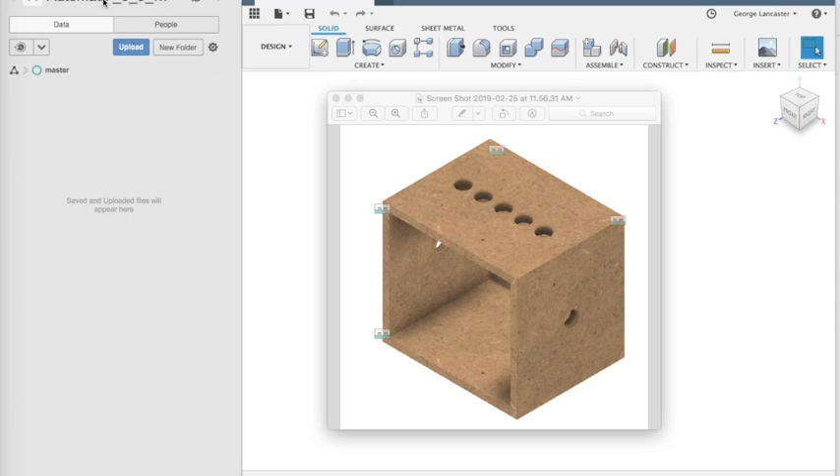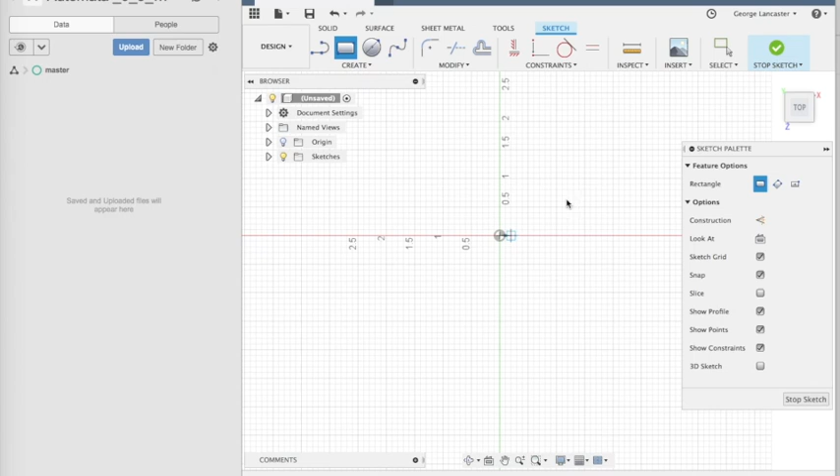The first step is to make sure we're in our correct project, and we're going to create a new part, create a sketch. I'm going to start on this because that to me feels like we're sitting on the ground. The bottom of the box is 4 inches deep by 5 inches wide.

So there's our sketch, and then we can extrude that 1/4 inch because that's how thick the wood is going to be. So there's the bottom. It doesn't much look like wood, so I'm going to change my body.

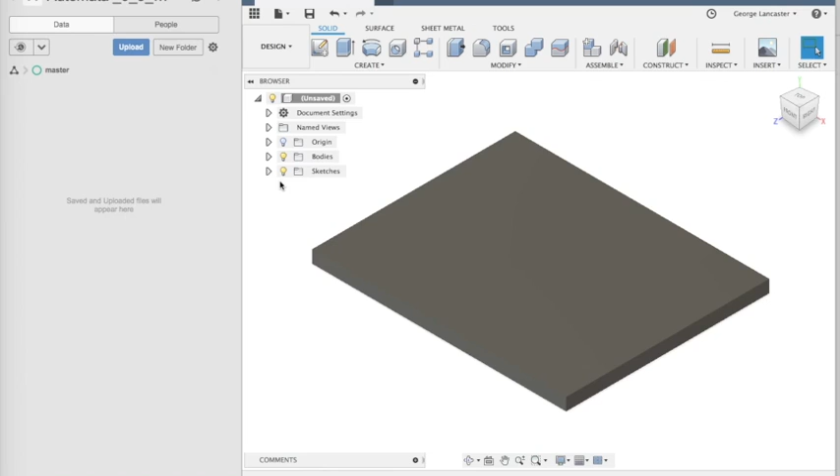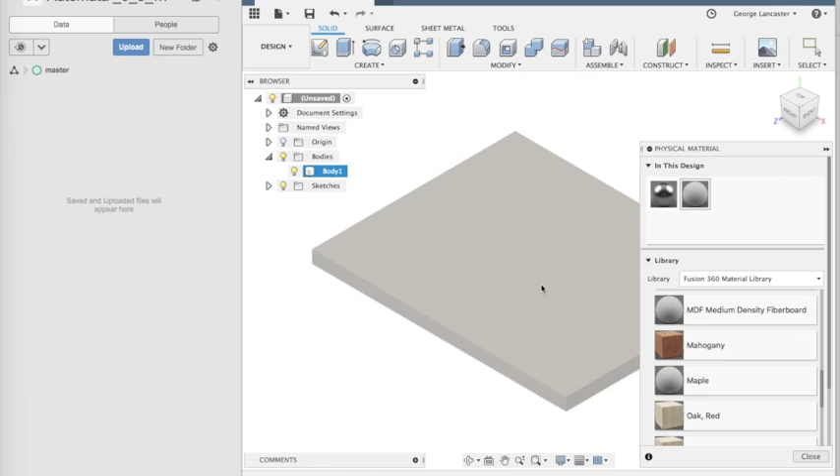Number one, I'm going to change the physical material to be a wood, and it's a fiberboard, so I'm going to choose that one and just drop it on there. Now I don't have an appearance for that downloaded, so I'm going to close that so it knows what the material is, but then I'm going to change the appearance, and I'm going to pick one of the woods that I have downloaded, and it really doesn't matter which one you pick, so I'm just going to pick a pine.

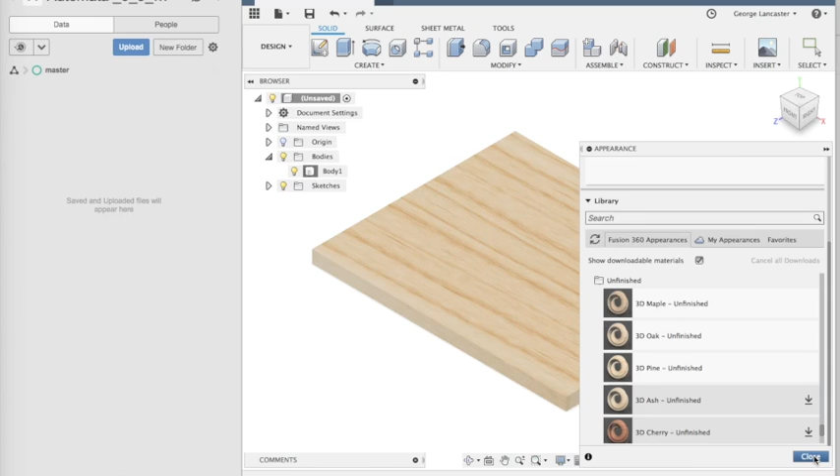And that looks kind of nice. Our wood doesn't look quite as nice as that, but that looks just fine for the purpose of this video. And then I'm going to save that as the box bottom.

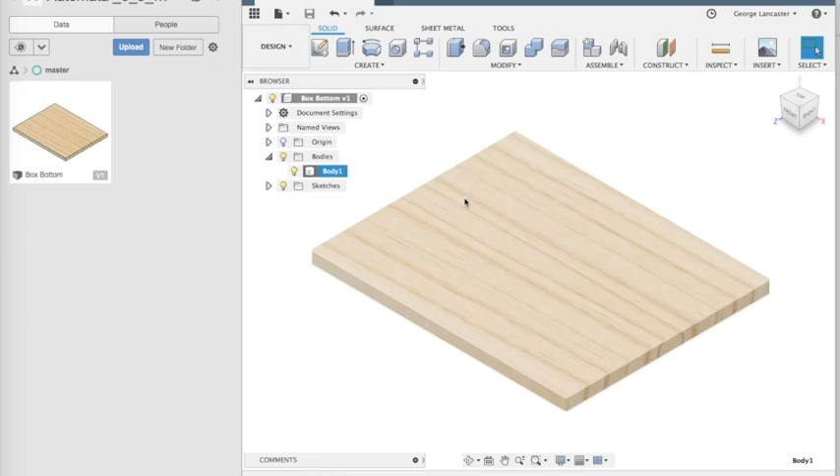The next thing I'm going to do is make the top because the top is the exact same size. It just has some holes in it. So I'm actually going to go up to File, Save As, so that I don't have to reset up the material and the appearance, and just save this as box top. And then I'm going to go back into my sketch.

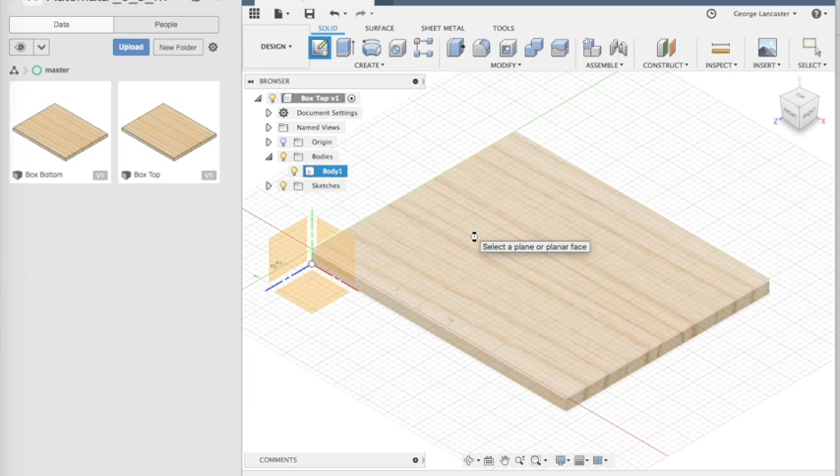I'm going to make a new sketch on the top of this that just has a couple holes in it, or a couple points on it for those holes. So there's a couple holes. I'm going to constrain those holes to be horizontal with each other, and then I'm going to dimension how far they are from the corner.

So D for dimension, and that's going to be too high. This is going to be 1.5 inches from the edge, and then I'm going to make this one 1.5 inches from the other edge. And that really doesn't matter - later on, we'll decide what design we want for our automata, and we will change those dimensions and add another hole.

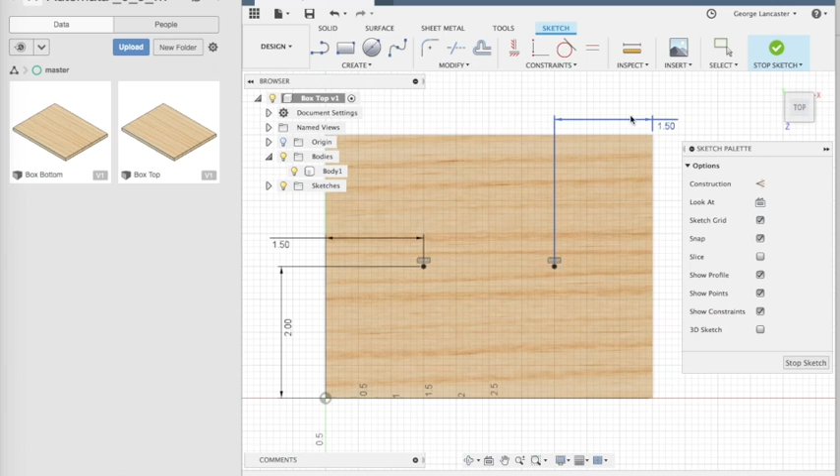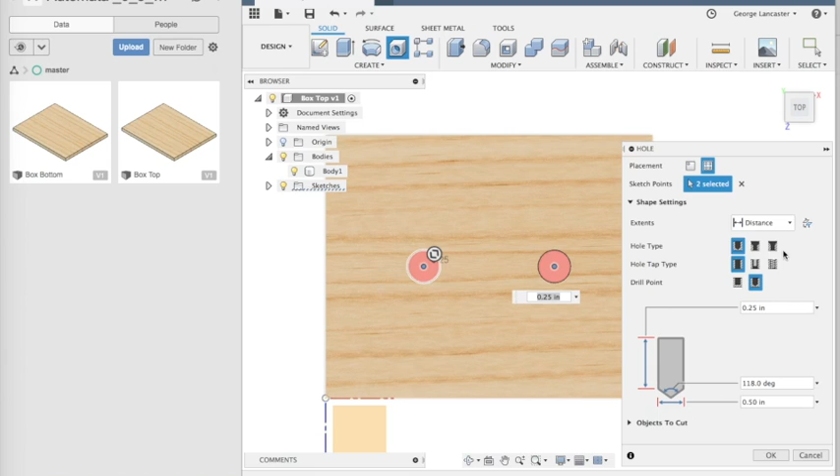So I'm going to stop that sketch, create some holes using those 2 points. They should be simple through holes. If it gives you that error that says it can't find a body, you can use flip direction to make sure it's going through the part. 1/2 inch, and I want it to go all the way. So there's my holes going through the part. I will save that.

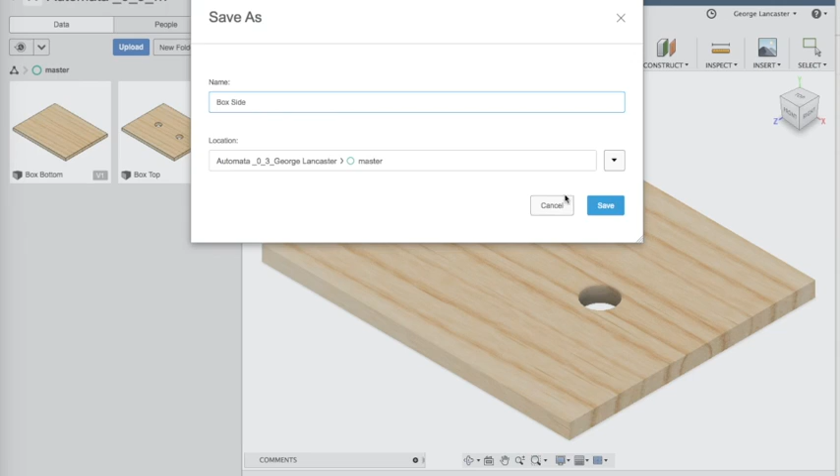And now I have my box bottom, my box top. The sides are very similar, except there's only one hole, and the sides are 4 inches by 4 inches. So I'm going to go in here, do a save as, say box side. And then I'll just modify my sketches.

So this sketch, the width is for the holes. I don't need this point anymore. And this is exactly in the middle, so that's 2 inches from the side.

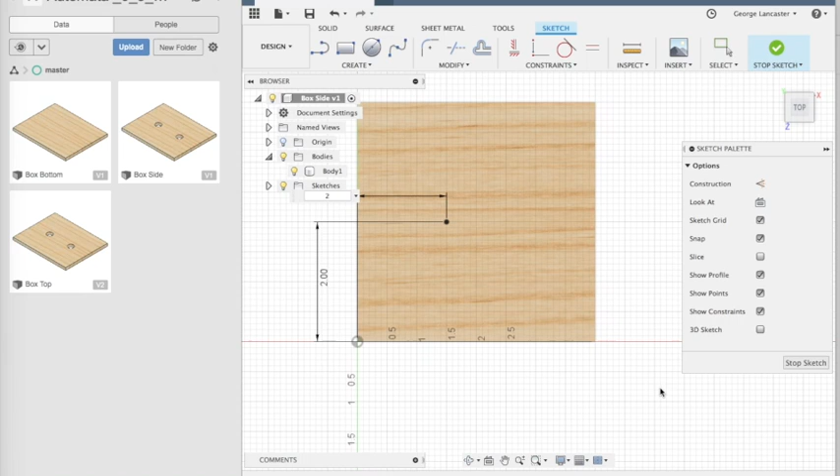So stop that sketch. And it's going to give me an error. It says I can't find one of the holes. I'm just going to get rid of the sketch points, add that one back in. And now you can see I only have one hole. It's right in the middle of the box. So that's the box side. When I save it, it'll update my preview over here.

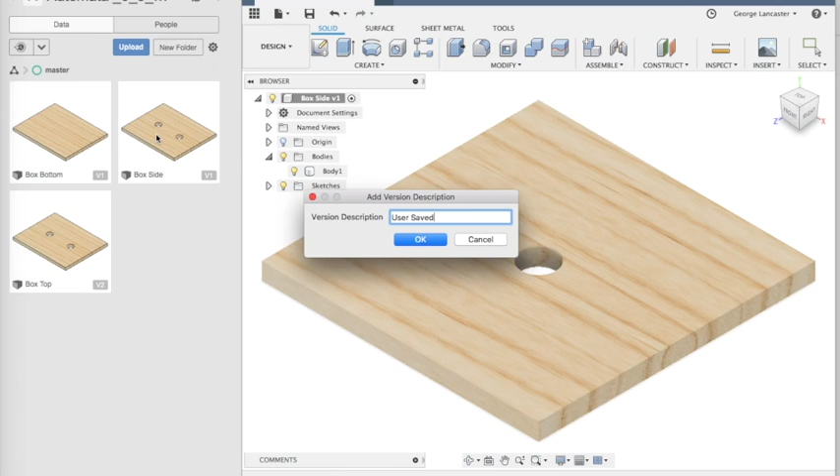And then finally, I need the back. The back doesn't have any holes, so I'm going to go back to my box bottom and modify that sketch. So if this entire thing is 5 inches wide, there's a side that sits right here that's a 1/4 inch, side that sits right here that's a 1/4 inch.

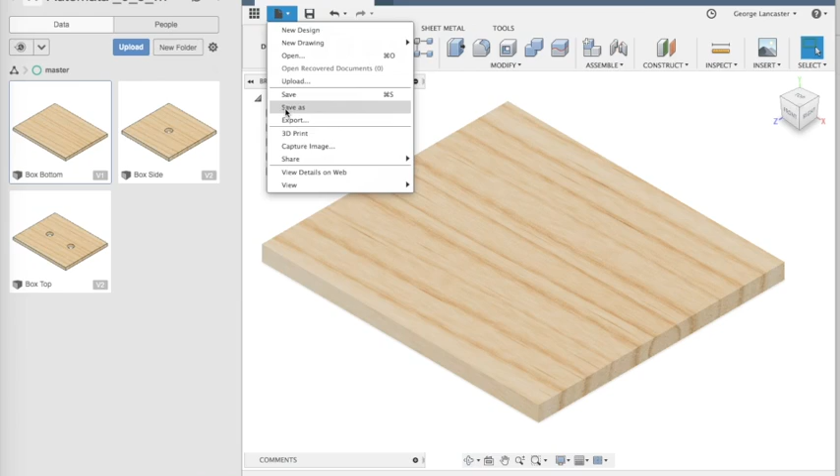So the box back is only 4.5 inches wide. 4.5, and save as box back.

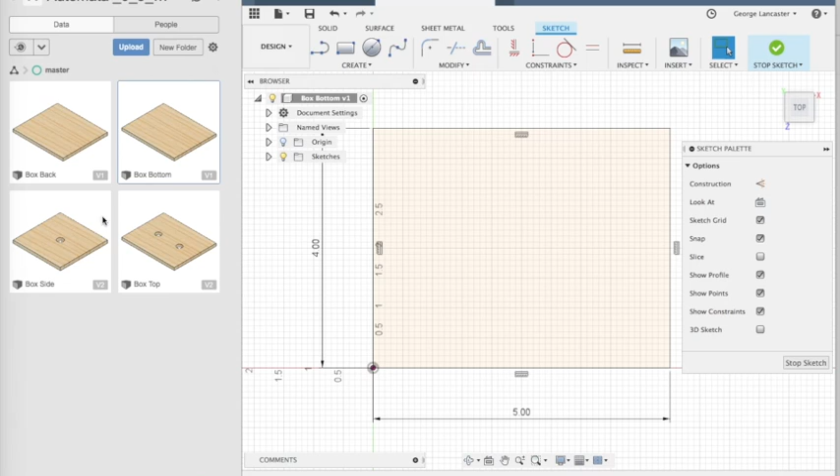So my box bottom is still 4x5. My back is 4x4.5. My sides are 4x4. And I've made all the parts that I need to make the assembly. That'll come next.